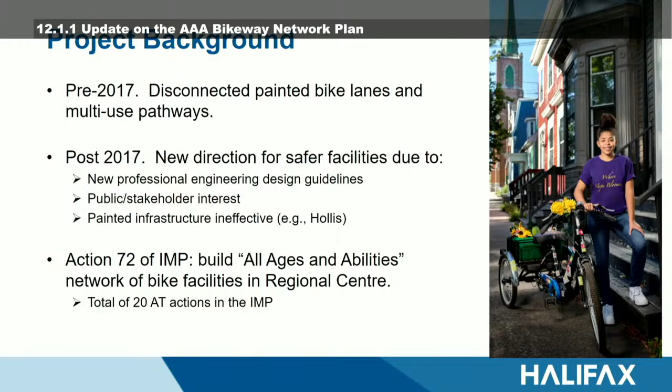And the final point here, because I think it's important to mention, is that while this particular commitment and action gets a fair amount of profile, there is a lot of other active transportation actions in the IMP that we've been working on across the municipality that are equally important or very important as well.

Here are a couple of the three main facility types, and these are defined in the professional guidelines, with thresholds and that sort of thing established. On the left we have a protected bike lane on the northern end of South Park Street, where the protection is an actual physical curb, sometimes a precast concrete curb.

In the middle is a multi-use pathway, a shared walking, biking, rolling facility, on Ahern. On the right is a local street bikeway. Those are local streets that provide great connectivity for people bicycling, where people bicycling share the road with motor vehicles, but where we put in elements like traffic calming and sometimes traffic diversion to manage those conflicts and minimize the number of motor vehicles using those corridors. On those streets, we want the motor vehicles to be the people who live there and visitors, and bicyclists to be everyone else.

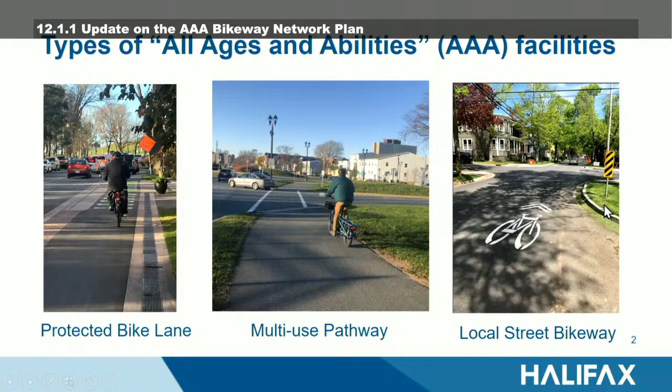I don't show on this slide something we spend a lot of time on, and that's a challenge for us: the intersections. Where a local street bikeway crosses a main road, or where some of these facilities come together, you can have all the separation you see here, but if you don't get the intersections designed properly and manage those conflicts, you're almost negating the benefit of what you see in the corridor between the intersections.

Our target in 2017 was represented by this candidate route map on the left. If you add up the blue lines, red lines, and green lines, we were talking about adding about 15 kilometers of each to a pre-existing amount of about 12 kilometers that existed in 2017. I want to highlight that when you add up all those lines, that's about 57 kilometers.

As we go through the planning and implementation of this network, some of these candidate routes are adjusted. For example, the Dartmouth North route that council approved last month is shown on some local streets. We moved it over to a parallel corridor following the planning process, so that number is probably going to go up or down a little bit by the end of this, but it's kind of where we started.

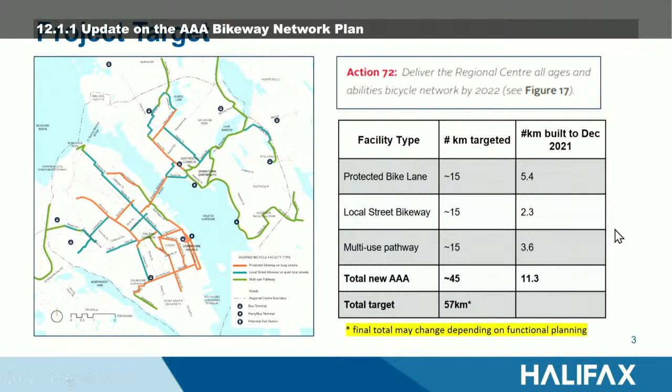I get a lot of questions about why it takes so long. Part of the reason is there are a lot of steps to getting these facilities built. Especially since we're not working with a greenfield, we're working with existing infrastructure in an older city, and getting to that ribbon cutting and beyond involves a fair amount of work.

It takes us between half a year to a year and a half, and sometimes longer, to go through the functional planning process. That's where we take those lines on the map and figure out what they're actually going to look like on the ground. I sometimes call that the proof of concept, and that's typically what we take to council for approval. You can see some of the steps there.

Then our group hands it off to our colleagues in the design and construction group within Public Works, and they take on the engineering side of it, doing the preliminary design, the detailed design, and getting it ready for construction.

For example, on South Park Street on the upper part where we pulled the curbs in, all of a sudden that's changing the overall configuration of the street. It impacts drainage and lots of other street functions. That's what my colleagues in the design group work with, changing the right-of-way. That's the design process, and you can see some of the steps there.

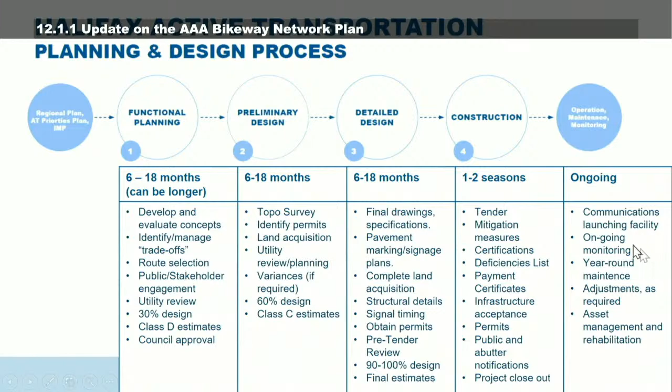The fourth bullet is adjustments as required. After it gets built, we take in comments, we observe it, and go back and adjust things as required. I'd offer the example of some of the end units on some of the bike lanes - they're precast concrete, and that's what we put the sign in. In some places, because of the tightness of the street and other things going on there, they've been knocked off continually. There are probably about 5 or 6 trouble locations around the municipality. So we have a group right now looking at those and coming up with a different solution, because those are just eating up our operations time to go in and put them back. That's an example of how we're going back to update and improve on what we've already built.

Our first projects went in 2018. A couple of years after that, we were fortunate to receive $25 million in infrastructure funding on projects that we think will cover between 2020 and take us to at least until 2024. That's a great deal for the municipality, in that we pay about 17% of those total costs, and the other orders of government cover the rest.

We had, in 2017, targeted completion by 2022 for some of the reasons that I described. We'll be at about 50% by 2022, and we plan to be at about 70% by 2024 with a combination of permanent, interim, and some tactical infrastructure. We've also moved the planning timeline out to 2028. That's our budget, and that's working with our design and construction colleagues to fit it into the overall transportation capital plan of the municipality.

The final bullet speaks to the fact that we've gone from not doing tactical or interim installations at all three years ago to doing a substantial and ever-increasing number of tactical interim installations. These are quick-build type projects which improve safety for people bicycling and help make those connections, and they'll be in place for anywhere between 1 and 5 years until we come in behind with our more substantial project. There's a picture of a traffic diversion measure at the corners of Isleville, Young, and Kaye Street in the north end, which has been helping reduce traffic volumes on Isleville Street, a major north-south corridor, and helping to improve conditions for people bicycling. So that's one of a number of tactical projects we have implemented and continue to implement.

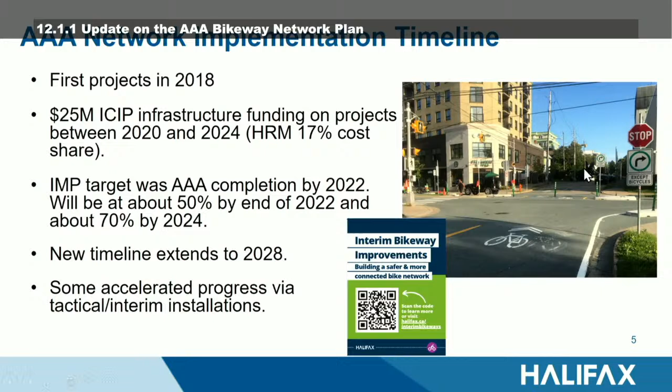So there's a lot here. These are some of the main reasons why these projects take so long, why it has been a challenge to meet our perhaps naive target that we set back in 2017.

I'd say the first one is just our internal capacity. When we took the IMP for approval, we did highlight that it just wasn't going to happen magically. We were going to have to change how we work, and probably add some new staff. It's taken a bit of time to get us there. We've needed additional resources on the design side, additional project management resources, and a couple of extra resources on the planning side.

I want to highlight that this AAA Bikeway Network is one of a number of other significant transportation capital projects that we've been planning and implementing. So it is among the top priorities, but all of these things take staff time.

It has taken us a bit of time to learn and adjust and adapt as our planning design guidelines and practices come in. A lot of these design guidelines we're following are relatively new in North America, and none of our planners or engineers learned this when they were in school. They've been learning and taking those lessons, trying to adapt them to the Halifax context. What you see in the design guidelines are usually beautiful wide corridors in imaginary cities built on flat plains, and taking those and adapting them to fit into our city is a complicated process.

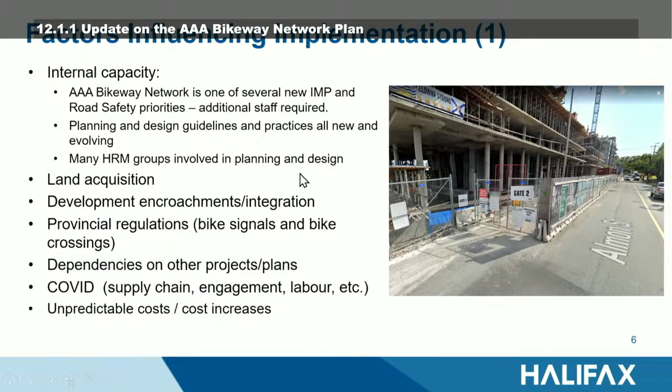These are some of the things we have to deal with, and as we plan these projects we come up with community concerns. I'd offer up the planning for the North End Bikeway as an example, where north of Almon Street was a pretty straightforward planning process, not a lot of contention. But when we got south of Almon Street, there were larger issues happening on those streets in that community around parking, historic discrimination, gentrification, and what had happened on projects on neighboring streets that kind of overwhelmed us. We had to step back and work on a different approach. Things like that take time.

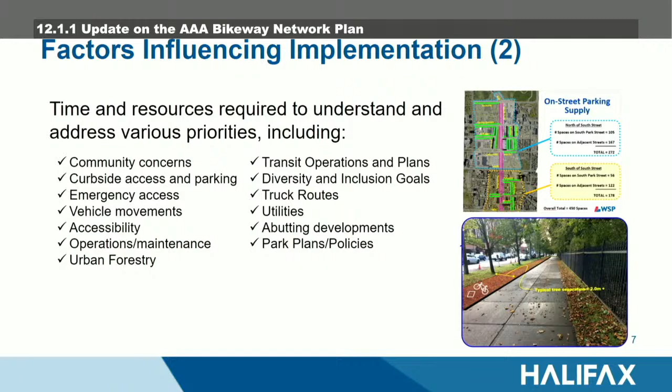We have to understand parking and curbside access impacts for all of our projects. Emergency access - we need to make sure the ambulance, fire truck and police officers' access is not impacted in travel time, so we work with them a lot. Vehicle movements - we still need to make sure vehicles can get around, that those can still happen, and those will change as part of our projects, but it's an important factor. I'm not going to go through this whole list, but just to give you a sense of the things we need to face and integrate into the planning and design process.

So we have this new updated timeline going into 2028, which is a lot less naive than where we were in 2017. We know a lot more now, we have expanded staff capacity, and we certainly have a lot more professional guidance and knowledge internally about how to plan and implement these types of facilities. We're pretty much finished that first stage of the planning design process on the entire network, everything's been started, and I feel fairly confident we'll be through all of them, maybe with the exception of one, but probably all of them by next year.

Looking forward, a lot of the projects we have coming are ones where my colleagues over in asset management are chomping at the bit for bigger street rehabilitation projects, so there will be some good synergies with some of those projects going forward.

However, just to highlight, what happens going forward is there's still a lot of uncertainties. It will be really interesting to see what happens with project costs and what budget we have to work with - none of that's guaranteed. The land acquisition piece, if that takes time in one or two places, things will move out. I think we'll be able to finish our functional plans, but sometimes unforeseen things happen, and then there are dependencies with other projects.

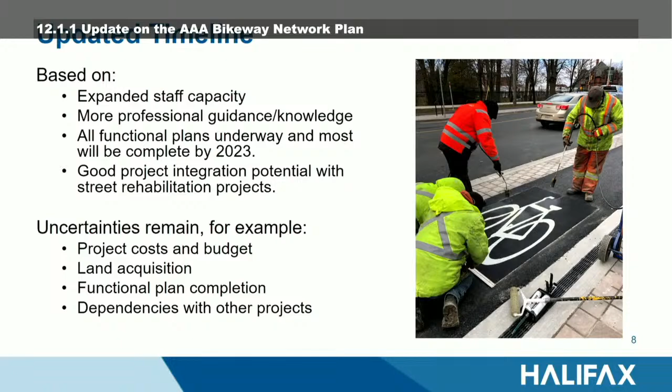So what I have here is a series of maps that attempts to illustrate where we started in 2017, and takes you through annually what we built, where we completed functional planning and detailed design, and some of the tactical projects.

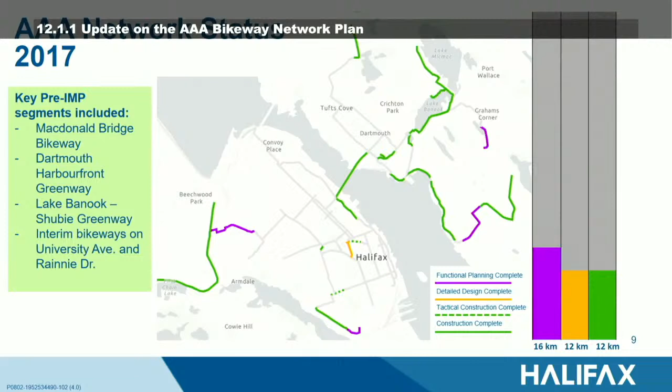This was the picture in 2017. There was about 12 kilometers completed, shown in green, which is almost entirely multi-use pathway except for the Macdonald Bridge Bikeway, which was separated. You can see a couple little dots - those were our first separated bikeways on Rainnie Drive and University Avenue.

In our first year of implementation, we built the Woodside multi-use pathway, the Ahern multi-use pathway, and Dalhousie University built a painted AT facility through some parking lots between Spring Garden Road and Morris Street, near the library there.

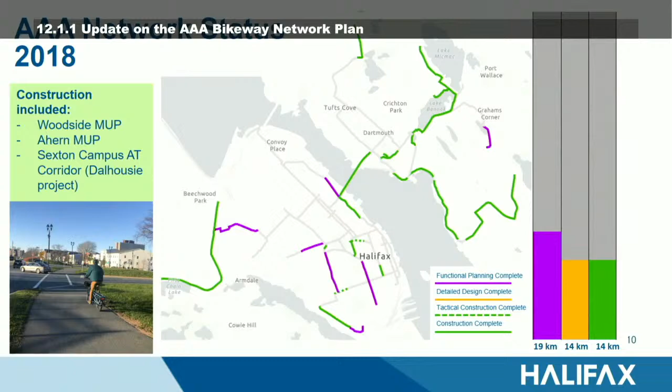Moving on to 2019, we started building the Vernon Street and Allan Street local street bikeways. We got our first curb-protected bike lanes in South Park built. Hollis Street was mostly built as well.

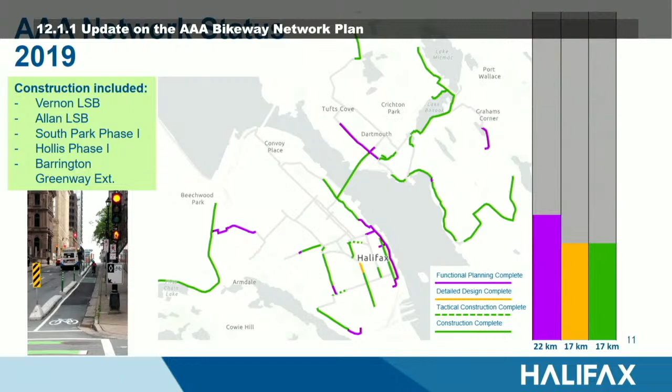A great project that a lot of us thought could never be done was getting the Barrington Street multi-use pathway north of North Street and the bridge up to Niobe Gate. We had a great partnership with the Department of National Defense and some great cost sharing that made that happen.

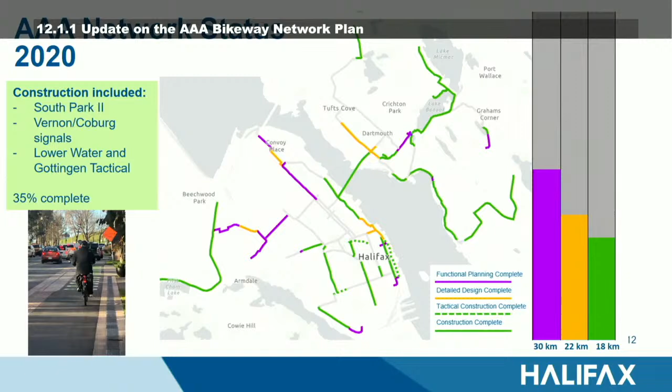2020 is when the infrastructure money started kicking in. We got South Park Phase 2 built, got some signals on Vernon and Coburg, and really expanded our tactical program, working with our colleagues in transportation planning.

2021 was a big year in terms of getting that Wyse Road piece done. When you entered or exited the Macdonald Bridge Bikeway on the Halifax side or the Dartmouth side, you'd spit out into probably the most complicated and busy intersection in the city. Making that easier to navigate makes it a lot more accessible for more people.

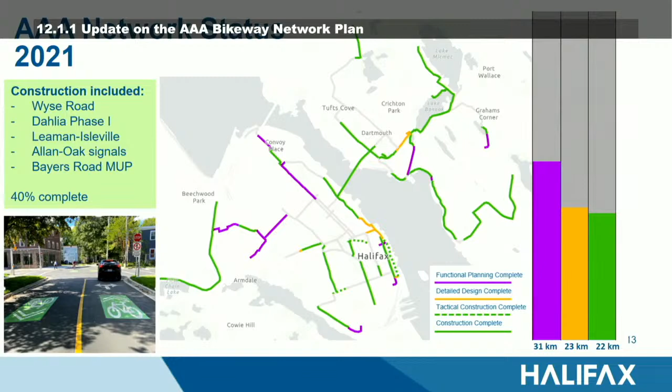This year, at exit 0 Joe Howe, we're finally going to have a half decent connection from the peninsula out to the western mainland and points beyond. We're getting Terminal Road and Hollis built, and we finished the Dahlia local street bikeway.

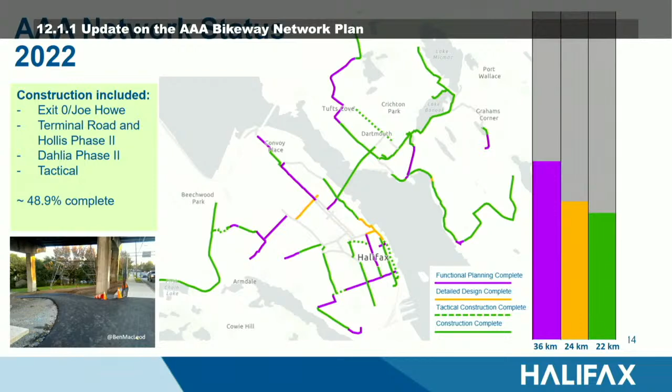We're not quite at 50%, but we're getting pretty close. There's about 8 kilometers of tactical bikeway that are partially built right now, and that will be completed in spring 23.

Next year, we're looking to get as much of Almon Street built as we can, subject to that encroachment coming down, plus a few projects on Dartmouth Harbourfront and a bit more of Isleville. Working with the Cogswell team, we're going to have a reasonable - it's going to be a constrained detour - but you will now be able to bike around that construction project.

Just to highlight here, you can see my cursor - things like this tell me that the network's starting to come into being. If you live anywhere in Dartmouth along this corridor, in the Flower Streets, you now have a pretty direct connection all the way across the bridge, all the way downtown, and back again.

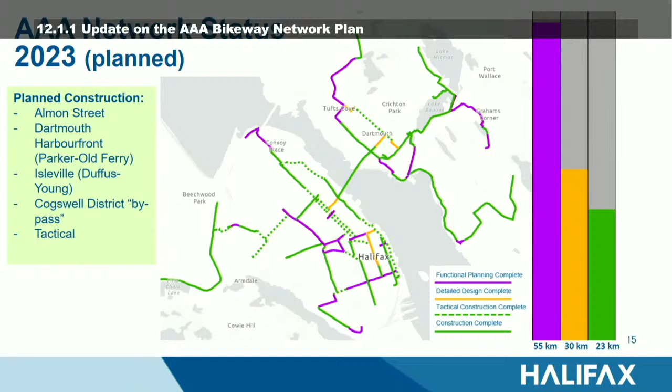Same thing if you're living in the north end of the peninsula - you've got a pretty good connection using tactical measures and what we've built right into the downtown. So the connections are starting to be made, and this is encouraging, at least for those of us working on the project.

2024 will be, I think, one of our biggest years in terms of getting the Halifax side of the Macdonald Bridge bikeway connection built. I think you're going to hear about Brunswick Street after me, and that's going to be a key corridor. Again, starting to see some of those connections come together.

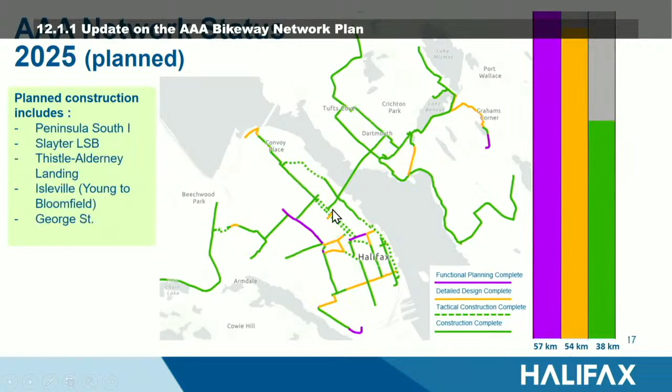I'm just going to flip through here - it's nice just to watch. Magic.

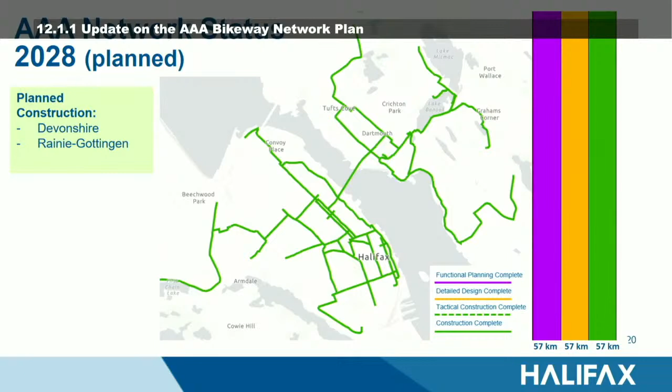I would say what happens in '26, '27, '28 could move around a little bit - one could go a year sooner, one could go a year later, could be done sooner. As those projects get a little closer, we'll have a better idea of exactly when they'll be built. But right now, that's where they are in our plan.

Another important thing to highlight is that as we've implemented these projects, we've learned a lot more about how much these types of facilities cost. We've certainly had to adjust our budget and expectations based on what we've experienced in the construction sector over the past couple of years.

Right now we're looking at a total build-out cost of about $72 million. Given the cost sharing we've been able to take advantage of, it'll be in the range of about $50 million - that's what we're planning for right now. Under our cost-sharing agreement with the provincial government, we expect that $25 million will more or less be completely allocated and spent in 2024.

Those new costs or those expanded costs are in the long-range budget plan that council is looking at right now. So we're doing our best to make those costs clear, budget for them, and prepare for them going forward.

I'm almost done here. I just wanted to put a couple of slides on the Macdonald Bridge Bikeway Connectors project. It is probably our highest profile project, and probably our most expensive single capital project, although there are a few other high-expense projects as well. Let me give you a bit of an update on where that is.

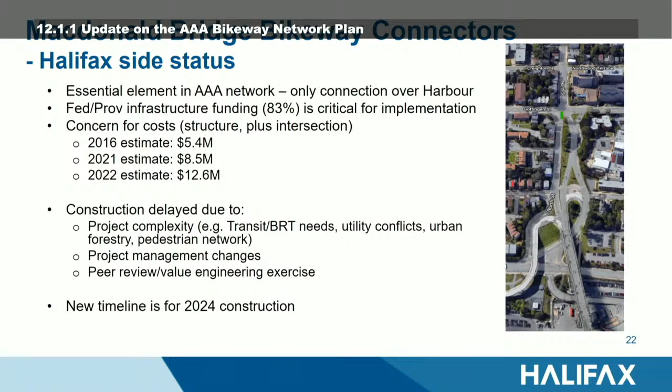Just to talk a little about this value engineering process—we gave you a bit of a preview at the November 22nd meeting. We think we need to do this peer review, or a sober second look at this project right now, based on those cost estimate increases. If we're going to spend that much money, we really want to make sure that is the best solution, the only solution, and just give us that extra level of assurance.

It's been looked at a lot, but this will give us one more opportunity to make sure we're on the right track. We'll look to see if the current option can be built at a lower cost, and we'll look at other options. An at-grade connection has often been discussed and looked at, but there are impacts—it impacts safety for bicyclists, it impacts the grade, it impacts vehicle movements through there. So we'll look at that again, and maybe there's a different way to align the structure that could save us some money. All of that will be part of the value engineering process.

We're working closely with Halifax Harbour Bridges on this. They've been a key stakeholder all the way through, and we'll be doing this work in 2023. There's a graph or diagram at the bottom that gives a sense of what the process is like.

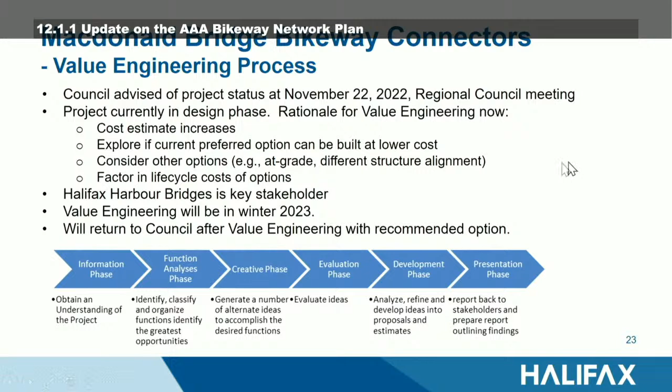And we're going to come back to council. I think we committed to doing that, or there's requests from councillors to do that when we talked about this at November 22nd. So there will be another opportunity for council to look at this significant project.

On the operations and maintenance side, we've got a new crew that came into being last year. We updated our winter snow clearing standards to make sure our facilities were incorporated and prioritized in those.

We have a great project this year that I hope we continue with the Ecology Action Centre, who are doing lots of great community-based bicycle education work.

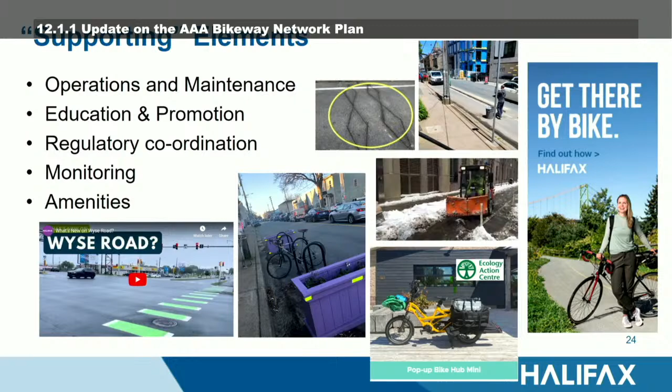And then the Wyse Road, that's just a snip from a video that, as we put in bike lights and new types of infrastructure, we've done our best to get some education out there for all road users on how to use them.

And that is the update for now. So thanks for the time, and obviously happy to answer any questions.

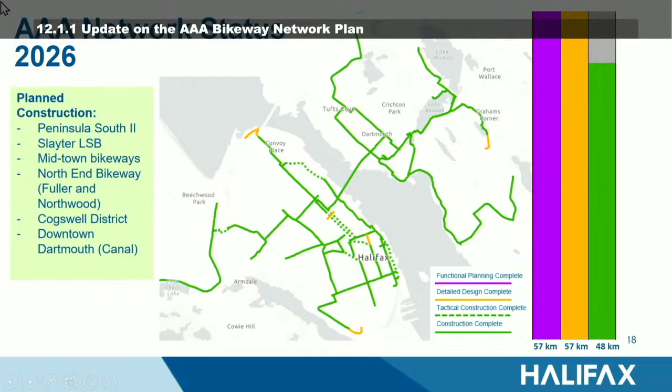Yeah, so thanks for the question. On the industry side, I think everybody's very familiar - demand exceeds supply significantly at the moment. That's both the province and the municipality calling upon the private sector to deliver more at a time when labor is tight. Particularly, traffic control this year was a very difficult sector. So even if the labor was available to do the construction, the traffic control was very difficult to get. And that has resulted in delays right across all of our work, getting out the door to industry and the completion thereof. You'll see our stats will be down this year, both in tendering and what is constructed.

I just want to amplify something Dave said - one of the things we're doing is making sure IMP is built into our planned delivery of tenders. So to the best of our ability, without holding up work unnecessarily, we are making sure that our road safety and IMP deliverables are going as early in the year as possible. Now, the tactical work we just launched at the end of the year, that was really just trying to get it out the door and make sure we get it done as fast as possible. That's kind of the exception. But we are trying to take council's priorities, IMP priorities, and make sure they're tendered as early as possible within the year to make sure they get done.

But yeah, there's no doubt. And where is that all materializing? Well, it's materializing in delays. It's materializing in quality of life for citizens because the sites are open, as has been mentioned. Construction sites are open a lot longer than they normally would. The costs are increasing significantly. We just ran some numbers again this year on our unit rates - we're probably looking 20 to 30% higher than what we saw, the experience we just had this year. So it's having a lot of impact: cost, timing, and finally quality of work.

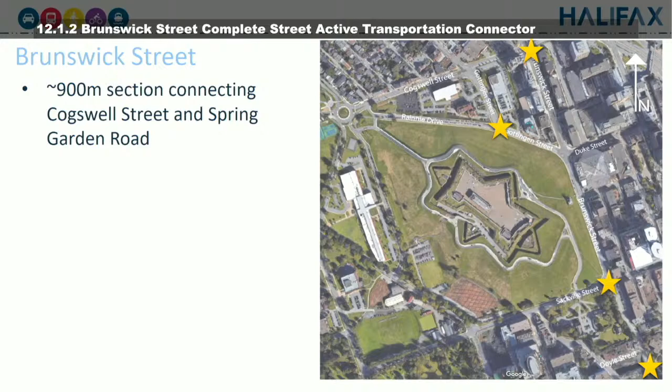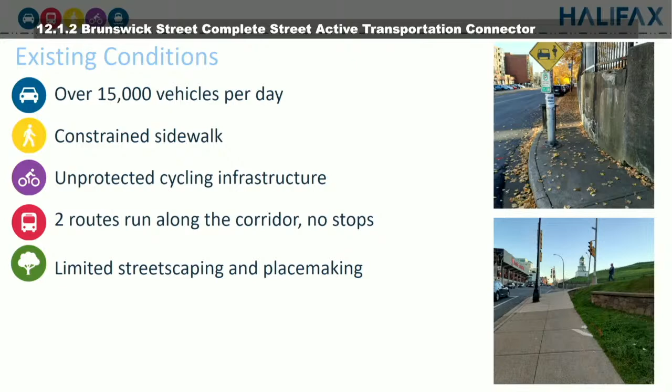So currently Brunswick Street accommodates an average of 15,000 vehicles per weekday. It does have sidewalk constraints, unprotected cycling infrastructure, and little to no streetscaping or placemaking features. The portion of Brunswick Street south of Sackville Street, extending to Doyle Street, has very narrow sidewalks, especially along the west side. It has an uneven surface and no street buffer. Between Cogswell Street and Duke Street, there is some minimal streetscaping that's occurred following the current downtown standards associated with some recent developments in the area. And between Duke Street and Sackville Street, the segment adjacent to Citadel Hill, one of the most prominent sections in our city, there are no streetscaping or placemaking features currently.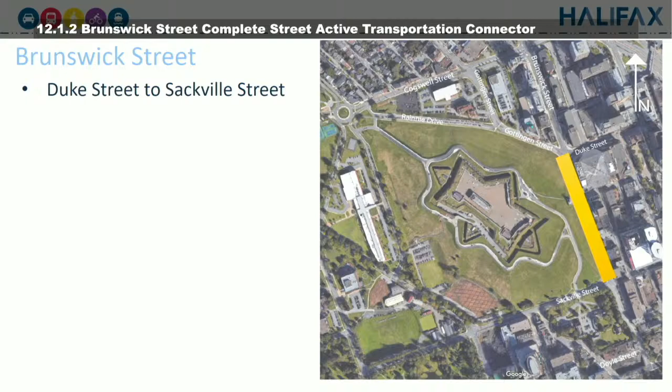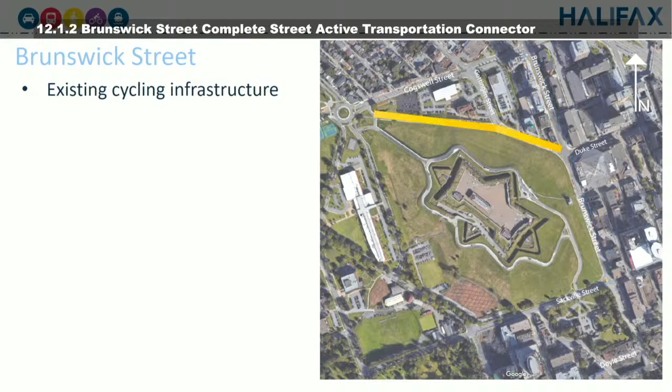So as far as the existing cycling infrastructure in the area, there's currently on-street unidirectional bike lanes on both sides of Brunswick Street that end at Sackville Street, and they do not connect to Sexton campus or the Spring Garden area businesses. There is also tactical protected bi-directional bike lanes on Rainnie Drive and Gottingen Street.

Through this project, we've come up with a recommended treatment to address these challenges and provide a AAA connection. We considered multiple design options, discussed in the staff report and in more detail in the functional plan report. Each design option was evaluated against the priorities in the IMP and the Complete Streets Framework in the 2021 Municipal Design Guidelines. The three concepts were presented for online public engagement in August and September of last year, with consultation with external stakeholders, business districts, and Parks Canada. A detailed breakdown of engagement results is in the functional plan report. For this presentation, I'm only going to discuss our recommended design option.

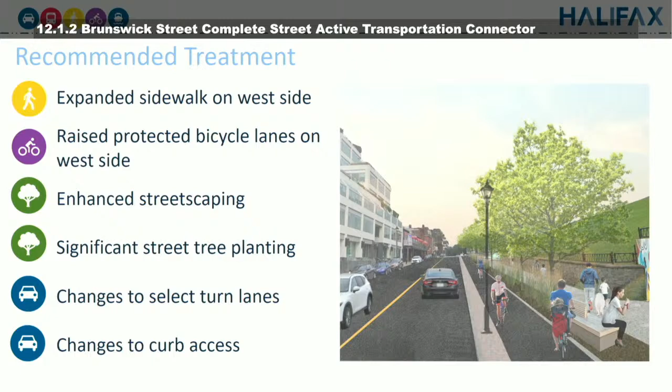The majority of the changes proposed in the functional plan occur on the west side, the Citadel Hill side. It proposes a raised bi-directional bikeway on the west side of the street, with landscape space separating the bike lane from the sidewalk and a hardscape buffer between the bikeway and traffic. Bicycle signals and some turn restrictions are proposed at Duke Street and Sackville Street, and the plan narrows pedestrian crossings at intersections wherever possible. It also provides enhanced crossing treatments at Spring Garden Road. The design will eliminate parking on the west curb for the length of the project area, and all on-street parking south of Sackville Street will be removed. We are retaining all the existing traffic lanes with just some changes to turning movements.

Over the next few slides, I'm going to show you the existing conditions followed by the proposed conditions for each of the segments in the corridor.

Between Cogswell Street and Sackville Street, the current sidewalks are wide but have no buffering or streetscaping. There are on-street painted bike lanes. Power and utility lines are underground, but the street lighting is mainly highway-style cobra head fixtures, not the pedestrian-scale ornamental lights we're used to seeing in the rest of downtown. Loading needs are primarily on the east curb, as the west side is dominated by Citadel Hill, and new construction primarily has off-street parking and loading accommodations.

The proposed treatment for this segment increases the sidewalk width, providing space for trees, furnishings, and snow storage. It maintains curb access where it's needed most on the east side, and includes curb extensions to reduce pedestrian crossing distances and increase pedestrian storage space at critical intersections, like outside the Scotiabank Centre. We are proposing to eliminate curbside access along the west side, as I mentioned.

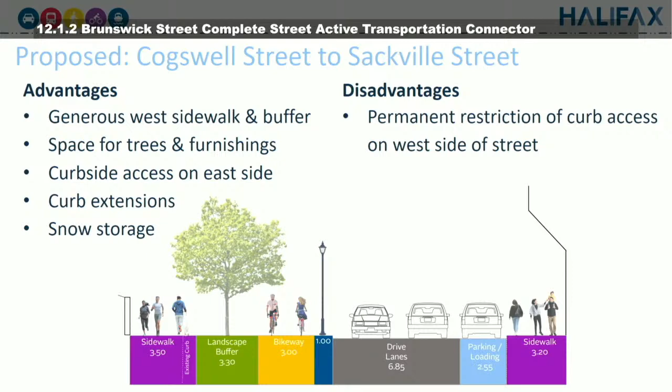This is a zoom in of the Gottingen Street, Duke Street intersection. You can see we've added curb extensions outside the Scotiabank Centre and the additional pedestrian storage space this will provide. Additional space is also provided at the steep northwest corner, which can be used to help soften that grade and make it more accessible.

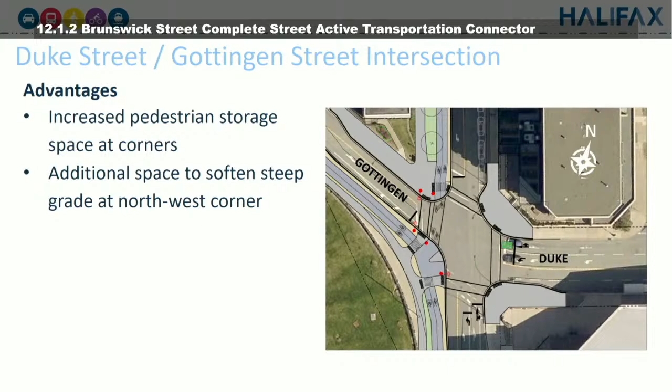Between Sackville Street and Spring Garden Road, we have a concrete sidewalk which is very narrow, about 1.8 meters at most, with pinch points that go less than 1 meter. There are no streetscaping features, and the area has parking on both sides. There are very few parking or loading needs along the west side, and the majority of east side destinations do have off-street parking and loading access available. The power and utility lines are above ground for this segment, which is largely responsible for many of the pinch points we see.

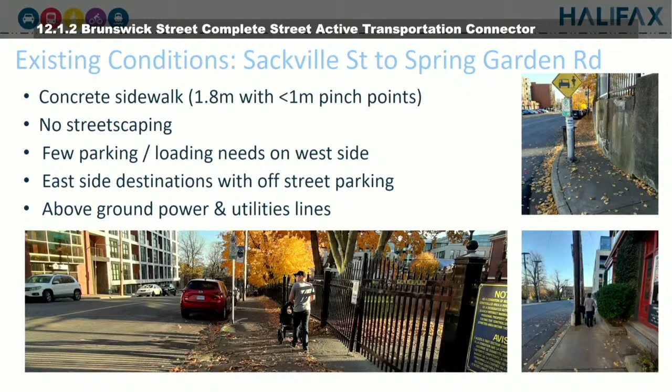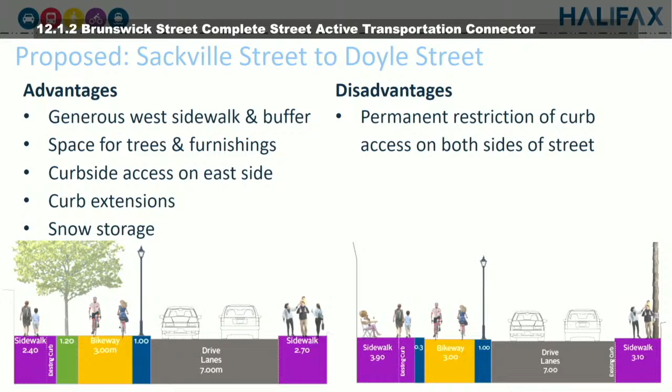Between Sackville Street and Doyle Street, we are proposing increased sidewalk widths, which again provides space for trees, snow storage, and some street furniture. The proposed cross-section eliminates curbside access on both sides of the street. It also provides consideration for existing patios, specifically at the corner of Brunswick Street and Doyle Street. At Steve-O-Reno's Cappuccino, we have allowed for the fact that they have a patio, and we know they would really like to keep it. We are seeking council endorsement to proceed with plans to bury the existing overhead power and utility lines along this segment, which will go a long way to improving conditions here.

Sackville Street was mentioned by Dave earlier. It is one of the challenges and one of the reasons this wasn't delivered tactically previously. At the Sackville Street intersection, the dedicated right turn channel will be removed, allowing the creation of a large plaza at the foot of Citadel Hill. We have been speaking with Parks Canada about opportunities to improve connections between the city and the hill, and potential integration for interpretive elements here.

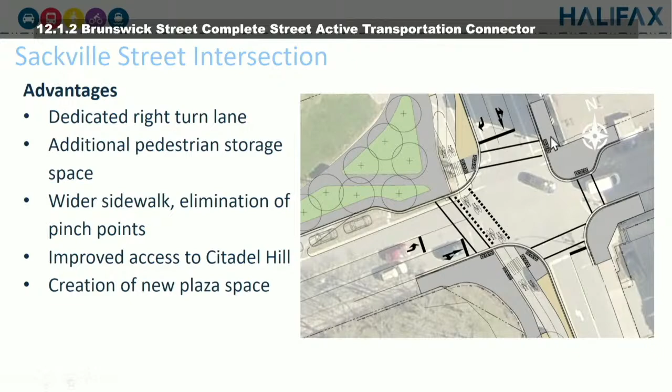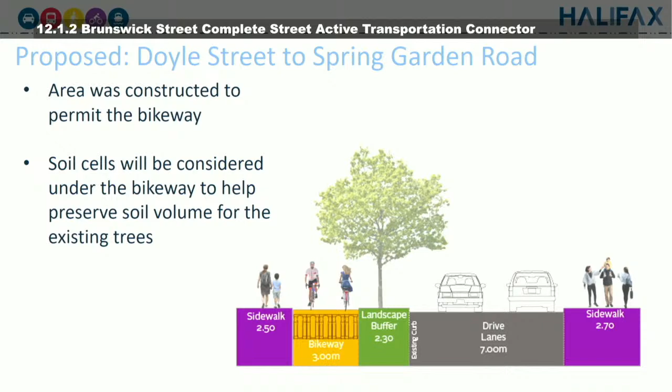Finally, the last piece, looking at Doyle Street to Spring Garden Road. This segment was reconstructed recently as part of the Doyle Block development. The reinstated curb and the placement of the trees were designed to allow for the implementation of this bikeway, so the trees will remain. We will just be paving a section of the existing sod, and we will look at whether or not soil cells will be required underneath the asphalt to help preserve those trees, because right now they are doing very well.

Looking at Gottingen Street, it currently has a tactical bi-directional bikeway on the south, Citadel Hill side. There are no streetscaping or placemaking features, and no existing curb access in this area. Power and utility lines here are currently above ground.

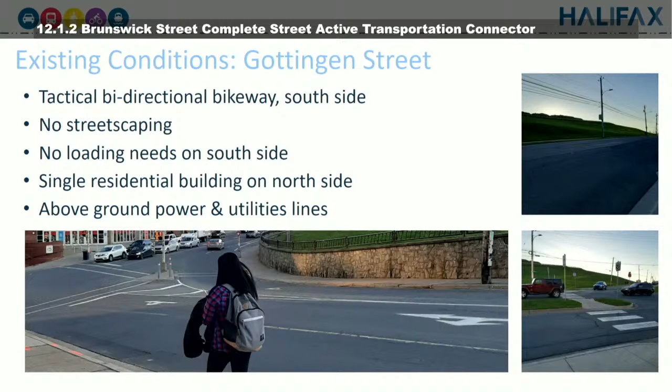We are looking again at increasing sidewalk widths, providing space for trees and furnishing, and snow storage. We are looking at narrowing the roadway width to the standard 8 meters from the 2021 municipal design guidelines, and again seeking endorsement to bury the existing overhead power and utility lines along this portion of the corridor.

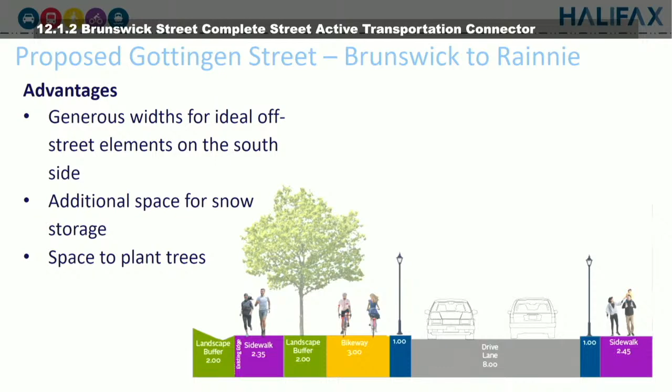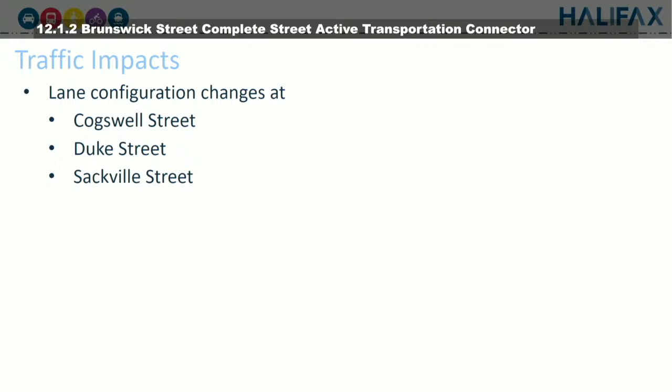Looking at the traffic impacts, lane configurations have been modified to allow space for the buffer between cyclists and vehicles, as well as cyclists and pedestrians, while preserving parking along the east curb. The sidewalk buffer provides space for placemaking features like trees, public art, street furniture, and interpretive elements. On the screen is the Cogswell Street intersection.

At this intersection, the street widths are being reduced as part of the Cogswell project as well as this project. The existing configurations are shown in gray and changes are highlighted in color. In both the eastbound and northbound directions, the existing dedicated left and through lanes are being combined, and the dedicated right turn lanes will be maintained.

Moving south to Duke Street, at the Brunswick-Duke Street intersection, the existing tactical changes will become permanent, combining the right turn slip lane into the existing through left lane. In the southbound direction, the plan proposes combining the dedicated left turn lane with the combined through right lane.

When we modeled this change, it showed longer queue lengths during the AM peak. As a result, we have reevaluated our allocation of space here, and we believe it's possible to keep the existing lane configuration, although that's not shown in the plan. The trade-off would be the elimination of 3 proposed trees and reduction of landscape buffer space for a short segment. We are recommending this be further evaluated during preliminary design.

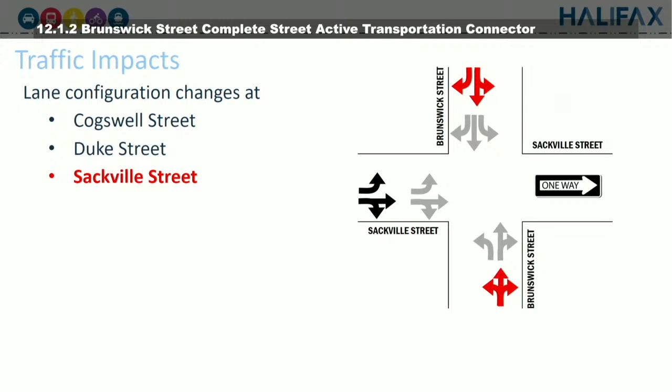Finally, at the Sackville Street intersection, the existing westbound right turn channel will be removed. This is replaced with a dedicated right turn lane, which provides comparable service levels to the existing conditions. The dedicated southbound through and left lanes have been combined. In the northbound direction, the northbound left onto Sackville Street has been combined with the existing through right lane.

With a bi-directional facility, cyclists, in this case northbound cyclists, will be moving contraflow to traffic, in the opposite direction, and will be in an unexpected location for motorists, where right-hand turns will cross the cyclist path of travel. Turn restrictions will need to be in place. The proposed protected cyclist phase will allow these users to safely move through the intersection while all cars are stopped. Once the bicycle signal is red, right turns will be permitted.

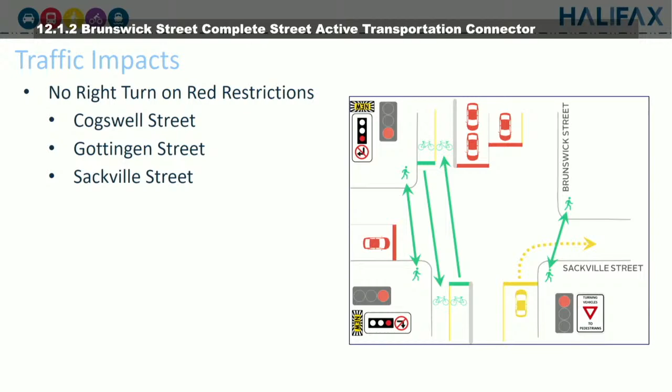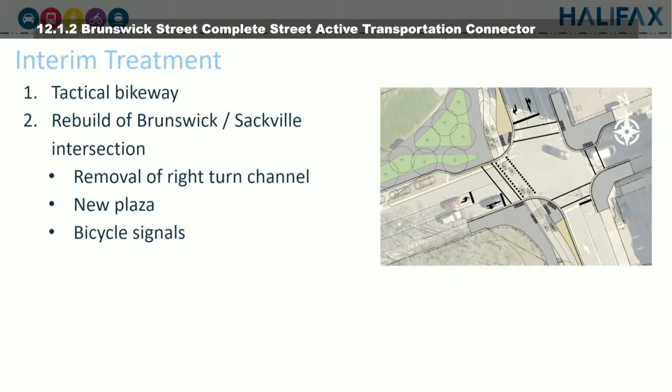What we are proposing to get this built more quickly is an interim, partial tactical, permanent installation of the bidirectional bikeway between Gottingen Street and Spring Garden Road. This will complete the connection to Sexton Campus and maintain the existing unidirectional facilities between Duke Street and Cogswell Street. The tactical installation will require the full rebuild of a new intersection treatment at Sackville Street to accommodate the required bicycle signals. We're targeting 2024 for the tactical installation.

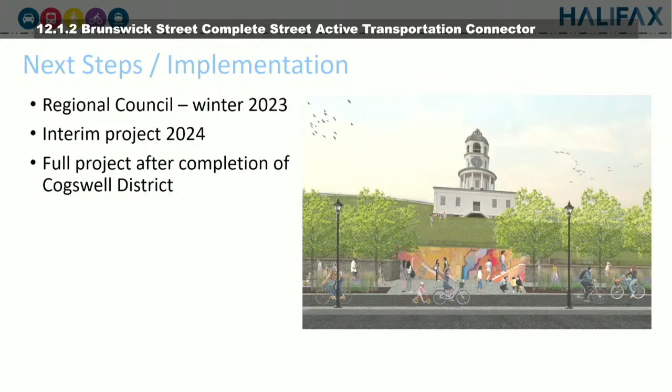Moving forward, we are hoping, with your endorsement today, to present to Regional Council in January or the winter of 2023, with the interim project installed in 2024. The full build out of this project will occur once Cogswell is complete, because having Brunswick Street torn up at the same time as Cogswell would not be desirable. Thank you.

What do you mean, if you want to tear it all up at the same time? It's too bad we didn't have the money to just do all these things when COVID was happening, right? Okay, thank you very much for that.

I'll go to, so I need somebody, thank you all for not having anything to say about this excellent project in my district, but someone has to put the motion on the floor. Councillor Cleary beat you a little bit. Councillor Cleary, we'll go to you.

I'll move that the Transportation Standing Committee recommend that Halifax Regional Council direct the Chief Administrative Officer to: 1, proceed with the preliminary and detailed design of the proposed street configuration and related changes to the right-of-way for Brunswick Street and Gottingen Street as described in the recommended design option section of this report, subject to approval of funding in the capital planning process; and 2, proceed with planning and detailed design for an interim solution that is partly tactical and partly permanent as described in the potential interim/tactical implementation section of this report for construction in 2024.